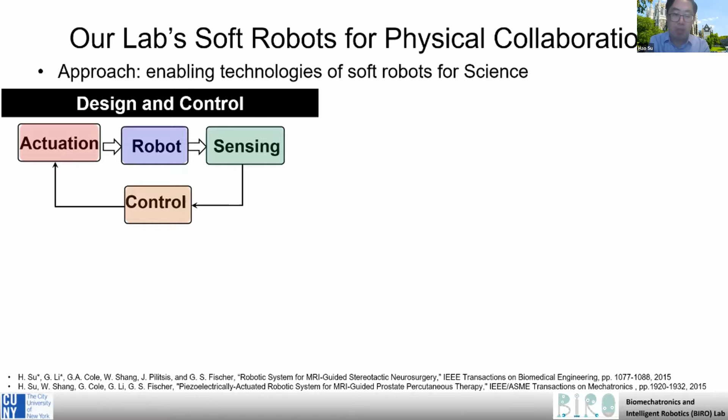In my lab, we focus on two domains. On the left, one domain is robotics, where we study design and control. Our approach is unique because we create enabling technologies like sensors and actuators. We also design robots from scratch. Then we develop controllers to embody intelligence to robots. On the right side, the other domain is scientific discovery. The ultimate goal is translational medicine. We use robots to address the unmet needs in medicine. Then we leverage robots to understand medicine and biology.

My lab developed multiple high-performance soft robot platforms in the continuum of care, ranging from soft exoskeleton for musculoskeletal injury prevention to cancer diagnosis and treatment using custom MRI-compatible minimally invasive surgical robots.

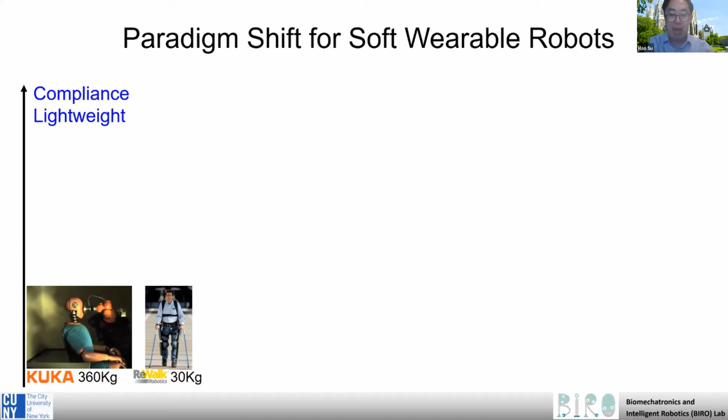In the last 3 years, we also worked on exoskeletons, both rigid and soft ones. The goal is to enable community-based mobility assistance. However, if we observe wearable robots through the lens of design and control, in terms of compliance and lightweight, state-of-the-art exoskeletons have no difference from conventional industrial robots that are generally heavy, rigid, non-compliant, and even dangerous.

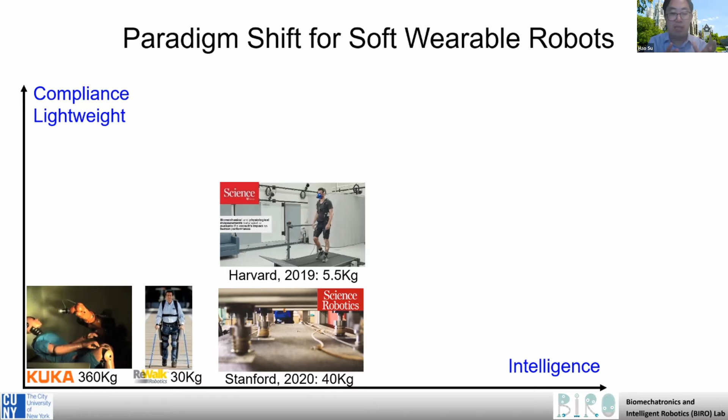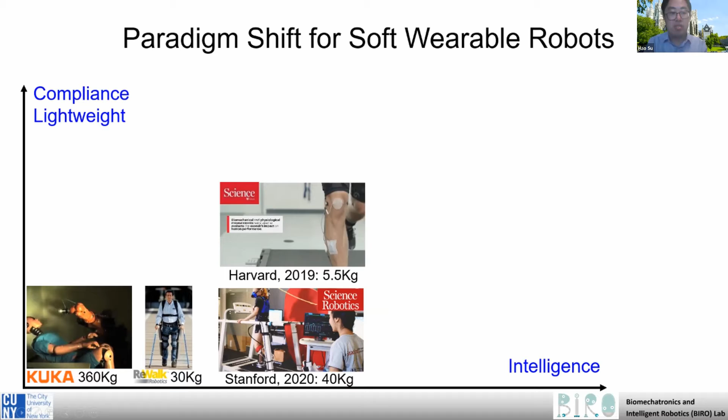In terms of intelligence, researchers developed a tethered exoskeleton that can assist running. But this platform is still kind of a heavy tether, right? To improve compliance, researchers developed an exosuit approach, which is a really promising solution. The overall mass is around 5.5 kilograms. It's still a little bit heavy, even for an able-bodied population. My lab, we think we developed the most lightweight powered exoskeleton.

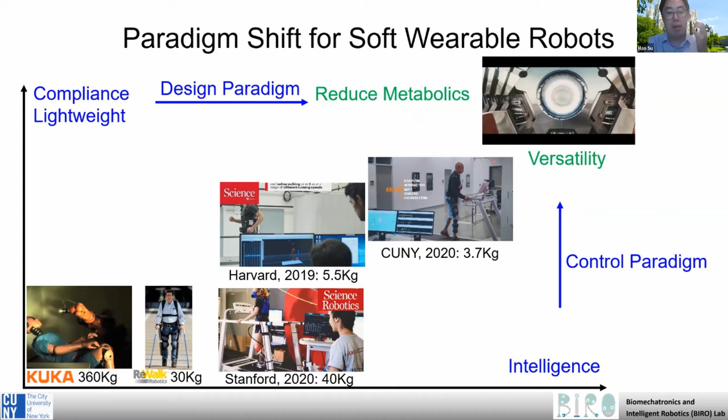So that's our focus. To enable robots truly useful in the real world, we need design solutions to make robots as light as possible. On the other hand, we also need new controllers to make the robot really versatile for multiple locomotion activities. So I would like to share two lessons I learned in the last few years. The first one is first principle-based thinking for design and mechanism.

First principle, as Elon Musk said, is a physics way to look at the world. You boil things down to the most fundamental truth, then you reason up from there. So for wearable robot applications, we consider the actuator or the motor has a lot of space to utilize the first principle to make it better.

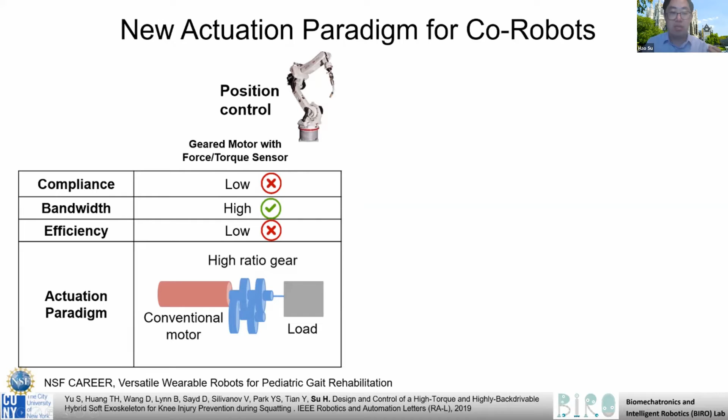Similar to a Sangbae-based idea, we are also trying to promote this quasi-direct drive actuation. As you can see, for conventional actuators, using high gear ratio transmission is good in terms of bandwidth, but pretty mediocre in terms of compliance and efficiency. Series elastic actuators have some benefits by using a spring to improve compliance, but the bandwidth and efficiency is still not very good. So similar to the Sangbae-based approach, we are doing a lot of quasi-direct drive actuation.

But our major focus is to potentially design better motors than commercially available actuators. So the custom motor with high torque density can truly optimize all three metrics.

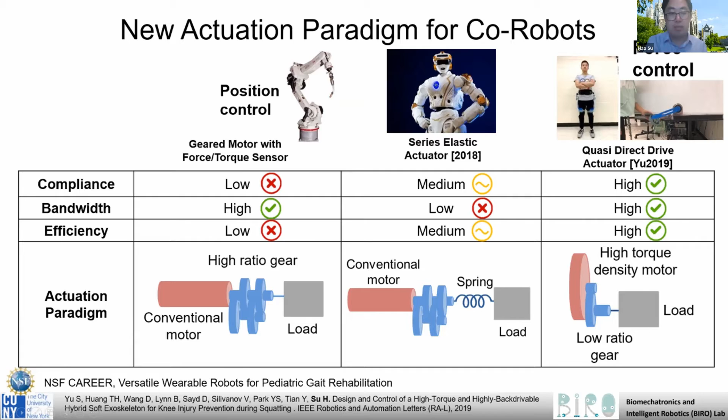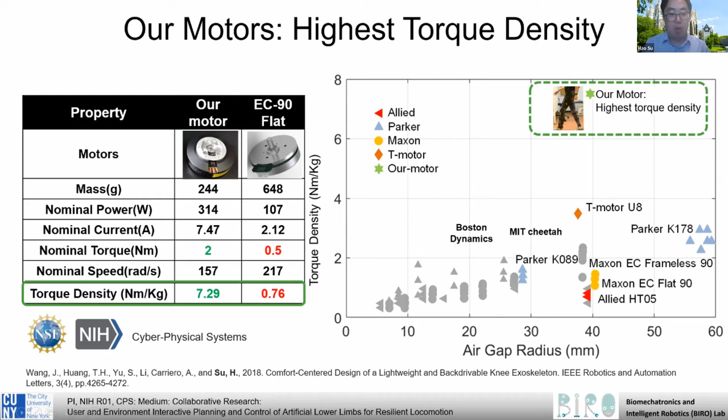Our electric motor, for example, not only has high power density, but also has a really high torque density, roughly close to 10 times better than a Maxon motor, and basically about 10% of the mass of conventional motors if you normalize by this so-called torque density, and also about twice as good as this T-motor used in many quasi-direct drive actuation platforms.

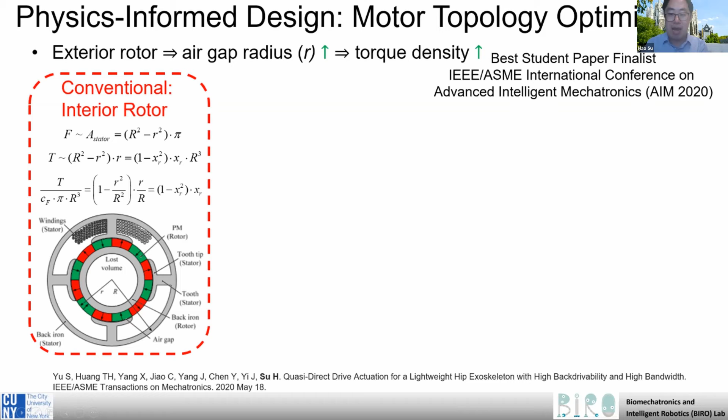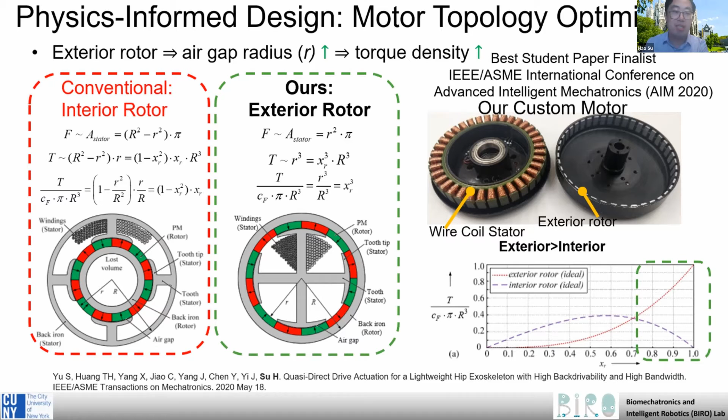To achieve those performance, we develop physics-informed design methods. For example, one method is called topology optimization. Instead of conventional motors based on interior rotor design, we create exterior rotor topology. You can see from this bottom right figure, an exterior rotor can significantly increase torque density. So we also did material optimization and some other physics-informed design methods.

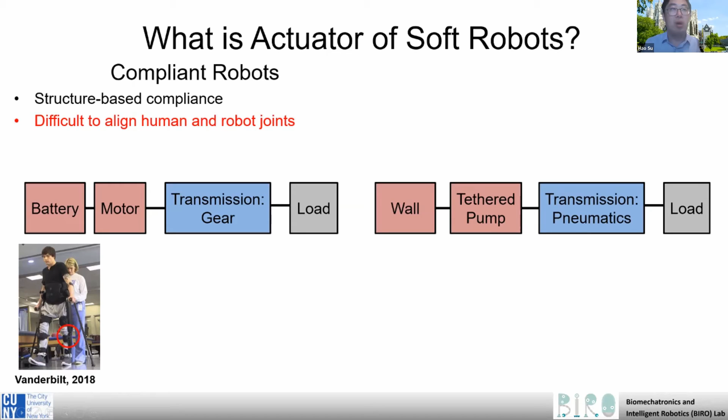Another observation from first-principles-based thinking is to figure out what is an actuator. This sounds like a silly question, but if you think about conventional rigid robots, or compliant ones like SEA, it's difficult to align a human joint with a robot joint. So our approach borrows from the soft robot community to avoid this joint misalignment issue. But if we think about actuators, in the soft robot community we typically talk about pneumatics as the actuator.

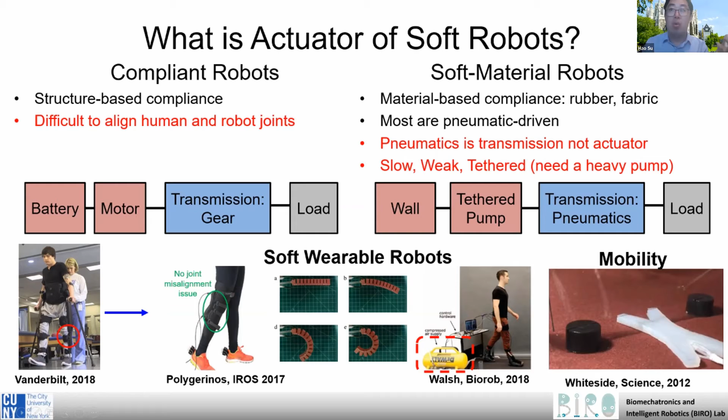But if you look at the transmission and actuator diagram, actually the tethered pump is the true actuator, because a true actuator is a component that converts electrical energy to mechanical energy. So pneumatics, I think, is actually transmission, not the true actuator. So how can we tackle the grand challenges in soft robots, which are typically slow, weak, and tethered, and make untethered, high-force soft robots?

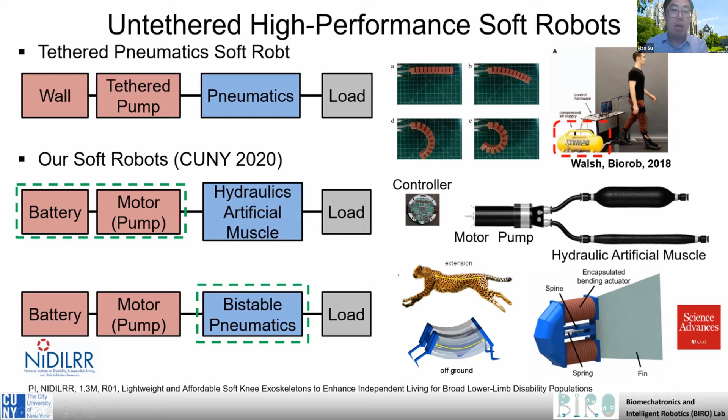In my lab, we have two approaches. The first is we leverage motor technology - it's still a rigid motor, but we use it in concert with a hydraulic artificial muscle. The second concept focuses on transmission design and uses bi-stable pneumatics to make the robot have high performance.

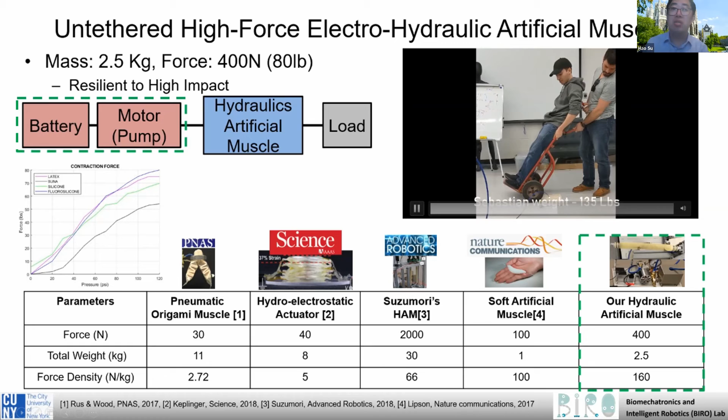For example, our first approach, this motor-based approach for hydraulic artificial muscle, is truly durable, can generate high forces, and the overall mass is within 2.5 kilograms including battery. That's truly an untethered, high-force soft actuator that can potentially be used for human augmentation applications.

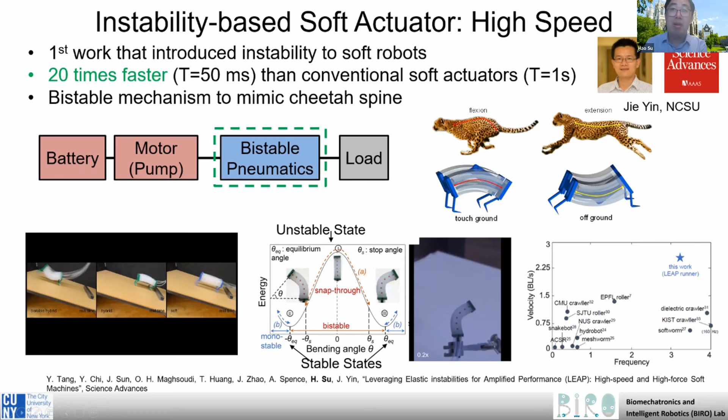As you can see, it's very resilient. We also explored this instability-based soft actuator. Besides the motor innovation, we focus on transmission innovation - this is the first instability-based high-performance soft robot. The robot has two stable states and one unstable state, so it can switch between those stable states and leverage this nonlinear phenomena to rapidly switch. It's 20 times faster than conventional soft actuators.

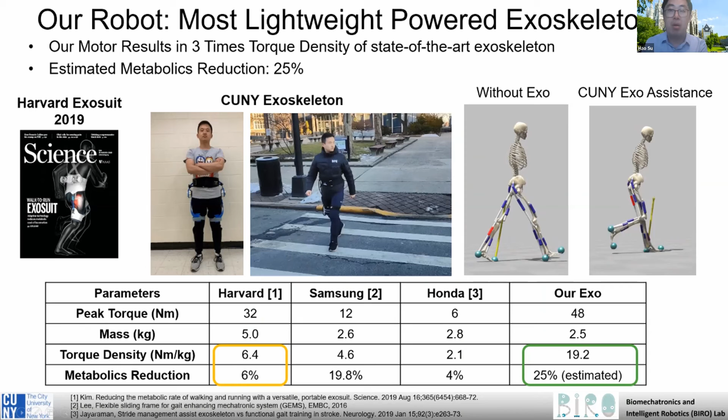We also do a lot of control work to estimate human joint movement in real time. Let's play a short video.

The design actually helped me. I felt I had more stability, it helped my balance, and my gait felt very natural. I felt very comfortable, like wow, this is going to be my friend. I love it. It took about a minute because it's pretty easy. I'm walking a lot lighter. It's very low profile, I don't hear noise when I'm walking. For everyday use, this is perfect. They have to tell us what they need, what they want, so that when we finalize the soft exoskeleton, it is something useful and meaningful, something that will help them in their recovery and activities of daily living.

We also applied this exoskeleton to a different population - people with knee osteoarthritis. We can reduce their pain by about 80%. We envision the robot could be medicine for people with musculoskeletal disorders.

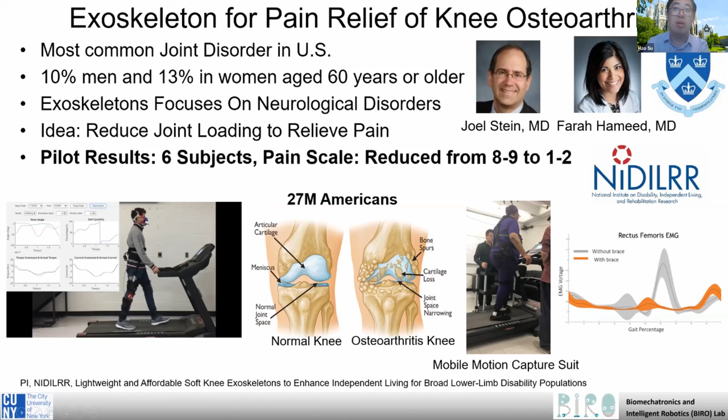We are also developing a versatile controller for multiple activity augmentation. This is really a grand challenge in the wearable robot community. Our controller can switch smoothly between loaded walking, jumping, and squatting without using an activity classifier.

More importantly, we observe really promising results. We can augment humans for loaded walking. People can jump higher and also squat about 50% more.

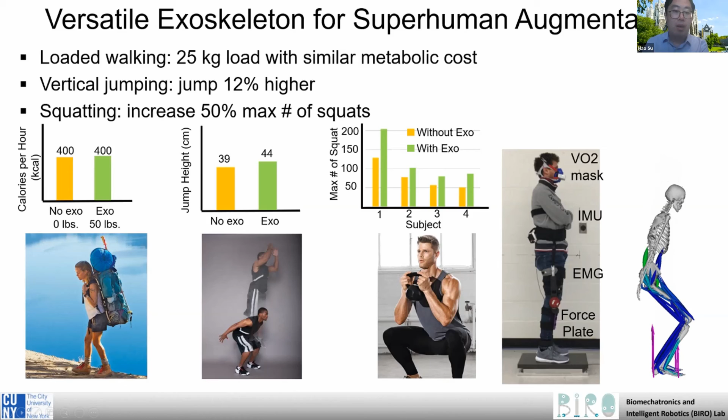Lastly, I want to share one quote from Da Vinci: simplicity is the ultimate sophistication. So try to keep your design simple.